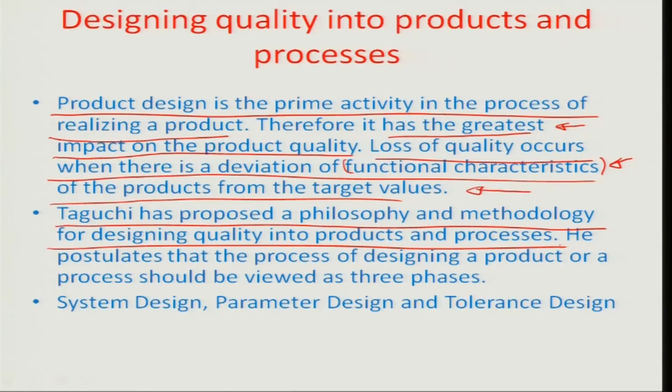So, the philosophy of product design was changed by Taguchi, who proposed a philosophy and methodology for designing quality into products and processes. Genichi Taguchi was actually an engineer by training, but he worked for the Electrical Communications Laboratory, ECL, in Japan, and he was actually a converted statistician, and he tried to develop some methodologies for doing quality analysis. Later on, his methods were very popular in the West, and in fact he was in an advisory role for several companies for a long time, including Bell Labs, Boeing, Xerox, and so on.

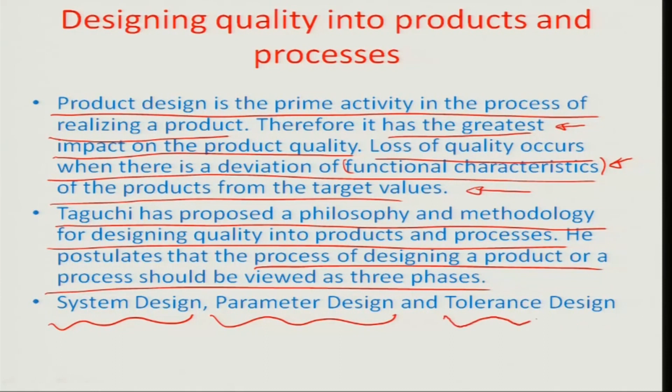So Taguchi basically was the first proponent of whether process design or product design can be made in a qualitative manner. He postulates that the process of designing a product or a process should be viewed in three phases. One is the design at the system level, then the design at the parameters level, and then finally the design of the tolerance to the parameters. So he basically organized the thought process of how to incorporate the design changes in a particular design.

When he talks about system design, it is the process of applying scientific knowledge to produce a basic functional prototype design. In this phase, new concepts, ideas, and methods are synthesized to provide new or improved products to the customer. That means that the basic design concept is established during the phase, including the selection of parts, materials, subassemblies, and so on.

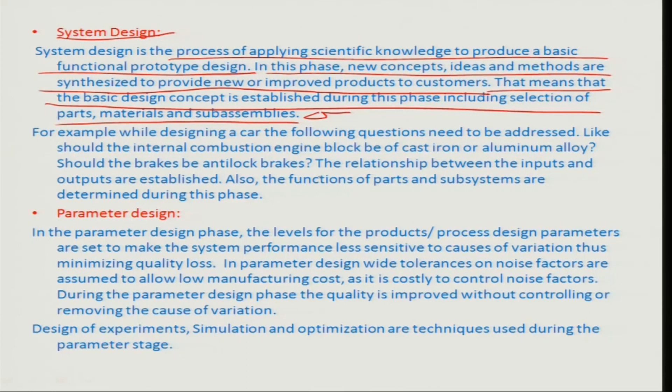For example, the following questions related to an automotive assembly can be addressed very well at the system design level: should the internal combustion engine be made out of aluminum or cast iron, should the brakes have the additional safety of an anti-lock braking system. These basic questions related to the materials or subassemblies used in the design have to be addressed at the system design level, and the relationship between the inputs and the outputs would be established this way. Also the functions of the parts and subsystems are determined during this phase once the system design level questions are addressed in the quality planning. So the next stage obviously is the parameter design.

As the name suggests, the levels for product and process design parameters are set to make system performance less sensitive to the causes of variation, thus minimizing quality loss. So choose the basic parameters. For example, in the case of engines, BHP or engine RPM can be a very good parameter.

So choose the parameter in a way so that there are minimal variations in the parameter, and the capacity of the particular engine to deliver a performance parameter should always be kept on the higher side just by a little bit, so that there is always compliance to the performance metrics. There should not be a situation when the metric is at a borderline and the product is not able to achieve the metric in most of the cases. So plan the performance metrics in a manner so that the metric lies somewhere within the capacity or the range of the product.

And in the parameter design, wide tolerances on noise factors are assumed to allow low manufacturing cost, as it is costly to control noise factors. So, obviously the parameter design stage should account for these factors where there is no control on the responsible factor contributing to the non-conformance, and these are the so-called noise factors. And so, you have to design the process in a way so that these noise factors are addressed and very tight control is kept at that particular level.

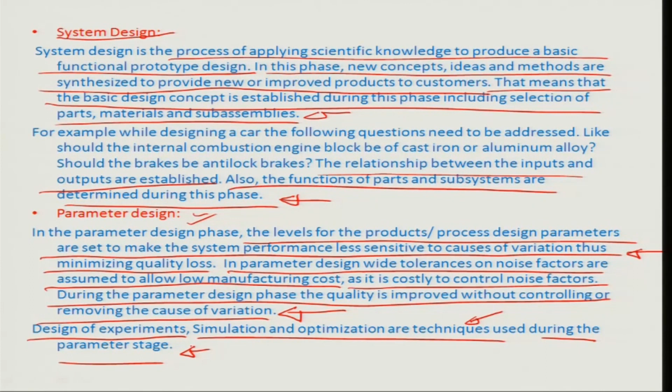And so then you can do design of experiments, simulations and optimizations, and various other techniques at this particular parameter fixing stage, so that you have the right choice of the parameter in the particular design. Then we talk about tolerance design, which is one step ahead of the parameter design, and it usually follows the parameter design phase. So, obviously, if you introduce a tighter tolerance regime, there would be overall quality improvement, because then the process selection will also have to be done in a manner so that the tight tolerance of the particular specification is met at the process level.

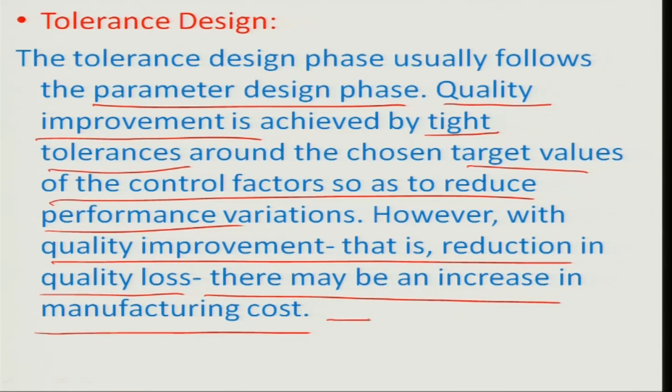So, you have to obviously choose the tolerances around the target values, very close to the target values, so that there is a marginal difference in the output from the parameter which has been designed in the earlier stage, which can be treated as allowable for the particular quality system. However, with the quality improvement and reduction in quality loss commensurate with it, there may be an increasing manufacturing cost because of the additional imposition on the process to maintain a tight standard. So, tolerance design is basically followed at level 3: the system design, the parameter design, and then finally the tolerance design stage of a quality design process.

So, having said that, let us now mathematically try to find out what Taguchi really means by the quality loss. If you look at the traditional concepts and then the introduction of Taguchi's concepts of design, you find that in a traditional system of quality monitoring, you had a lower specification limit and an upper specification limit, and the target value would be somewhere between the LSL and USL, and any product lying in this range between the two tolerance limits would be accepted. But for the first time, Taguchi proposed that this is like waiting until a non-conformance has happened and then taking a corrective action.

So, this is a sort of breakdown maintenance kind of situation, where an equipment has broken down already, and then you have to figure out what is the cause. So, you cannot wait until the process goes out of hand or out of the USL or the LSL specifications. Therefore, any deviation from the target has to be treated as some kind of an indicator, which in this particular case is known as the quality loss.

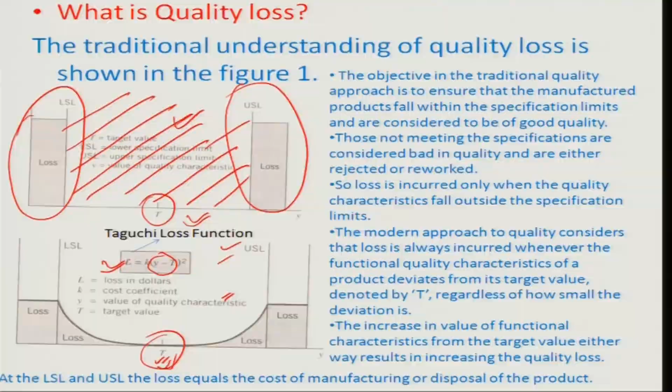So, obviously, T is the target, Y is the value of the quality characteristic. So, Y minus T is really the deviation from the target, and you are basically mapping the loss as the square of that deviation from the target. And loss typically is mentioned in currency units, so that every design specification non-compliance is now mapped as a loss, indicating what it is away from and how much away from it is going.

So, therefore, if you can set up a separate tolerance range for process control from the design specification range that is already available, you should not even allow the process to go out of the process tolerance range, which is well within the design specification range. So, therefore, in almost 100% of situations, there would be complete conformance of the parameter design attribute with the tolerance attribute which has been proposed at the design stage. So, that is how you mention the quality loss.

So, we do some statistical analysis here to see how this loss can really be computed, or how to control this loss, and then try some realistic examples where we will use this loss factor to identify things related to the process. So, let us say there is a process where yi represents the ith measurement of the quality characteristic. So, the average quality loss can be computed as the summation of all the different losses divided by n number of losses.

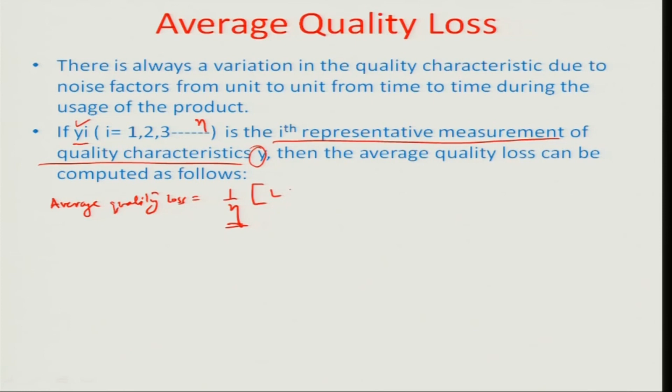Let us say there are n such representative measurements of the quality characteristic y which have been obtained. So, the overall average loss would be the loss because of y1 away from the target, y2 away from the target, y3 away from the target, and so on up to yn away from the target. Okay. And so, this can be written as k by n times (y1 minus t) square plus (y2 minus t) square plus (y3 minus t) square plus so on up to (yn minus t) square.

And we can represent this in a very convenient manner, because we can do some manipulations here. So, if we gather together these values, you have y1 square plus y2 square plus y3 square plus so on up to yn square. Okay. And then, I am sorry, plus n t square, since there are exactly n t square values which emanate here. And then you have minus twice t times y1 plus y2 plus y3 plus so on up to yn.

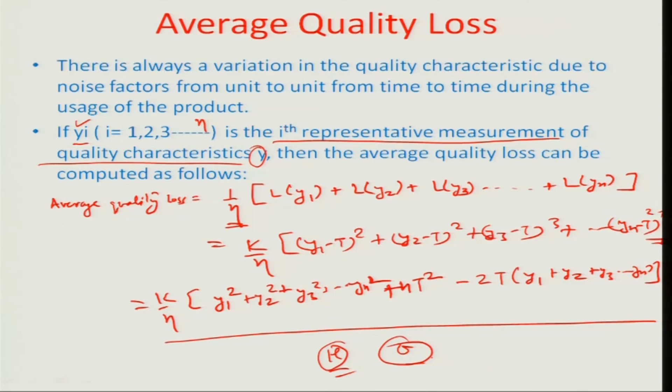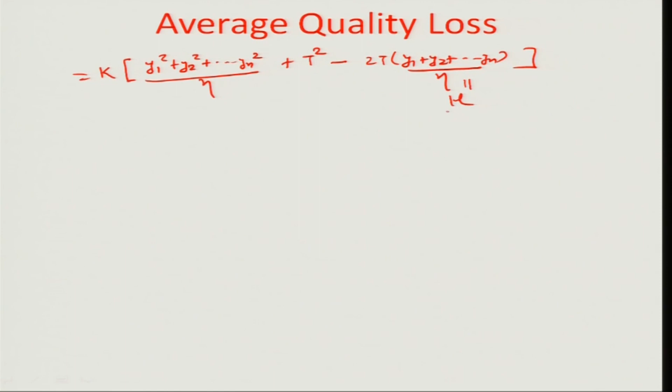Okay. And so, we can manipulate this whole equation to have realistic values in terms of the significant parameters for any such statistical distribution, like mu and sigma, the mean and the standard deviation. So, let us see how. Supposing we take the n value inside, we have the first term as y1 square to yn square by n, plus nt square by n, meaning t square, minus twice t times y1 plus y2 plus so on up to yn divided by n. Okay. And as we can see from here, you can introduce the mean quality characteristic mu, which is y1 plus y2 plus so on up to yn divided by n.

So what I would rather prefer to do here is add and subtract the values minus mu square and plus twice mu times y1 plus y2 plus y3 plus so on up to yn divided by n here, so that I can write this down as (y1 minus mu) square plus (y2 minus mu) square plus (yn minus mu) square divided by n, okay, plus t square minus twice t times y1 plus y2 plus y3 plus so on up to yn divided by n.

Okay, so that's how I can write the value of the average quality loss AQL as I have been computing from before. Okay, so how this term comes in is simply that if you open these square brackets, you will be left with y1 square plus y2 square plus y3 square plus so on up to yn square, plus mu square, because there are n such mu squares together and divided by n makes it mu square, and minus twice mu times y1 plus y2 plus y3 plus so on up to yn divided by n.

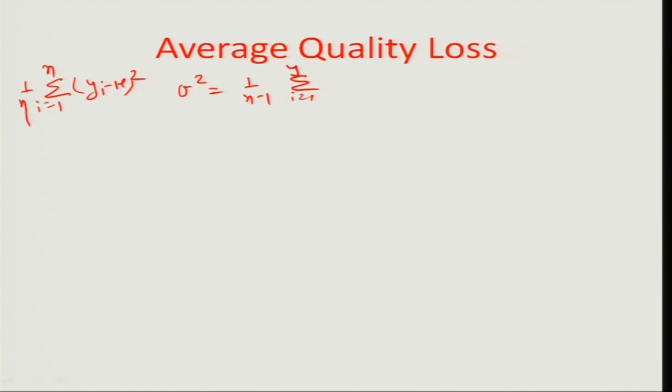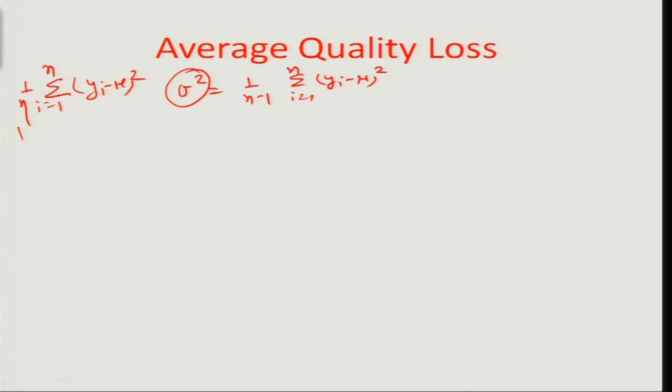If I look at this particular value here, this is nothing but sigma of yi minus mu square, with i varying between 1 to n, divided by n, right. So I can make this look like sigma square. We already know that sigma square, the square of the standard deviation, is represented statistically as 1 by n minus 1, sigma with i varying between 1 to n, of yi minus mu square. So I can write down this whole term as n minus 1 divided by n sigma square.

Okay, so that's how I can write this whole term. So obviously then the AQL becomes equal to, from the last term, n minus 1 by n, square of sigma, plus mu minus t square. So that is how you can record the average quality loss.

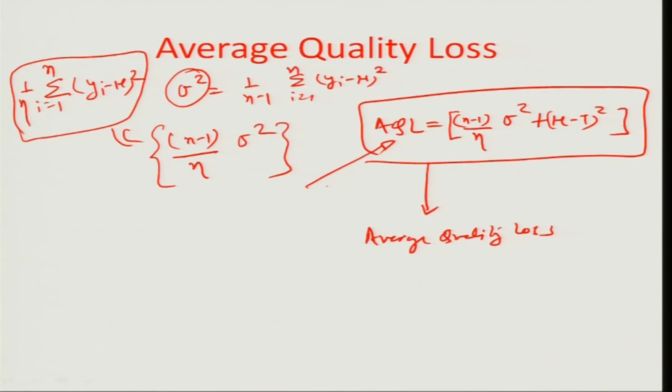Now, the question is whether this is really the average, and there are some quality parameters which are desirable and some which are undesirable. For example, vibration and noise in an equipment is an undesirable parameter, vis-a-vis a parameter like the dimension of a shaft. When we are talking about a quantitative parameter like the dimension of a shaft and how far away it is from the target, the average quality loss probably makes sense.

But when we are talking about undesirable characteristics like friction and wear, where the minimum possible the better, in that kind of circumstance it becomes a little difficult to understand this as the deviation from the target. So we will close this lecture here in the interest of time, but in the next lecture we will try and see if we can do something with this AQL so that it can change contextually to the kind of parameter that we are discussing.